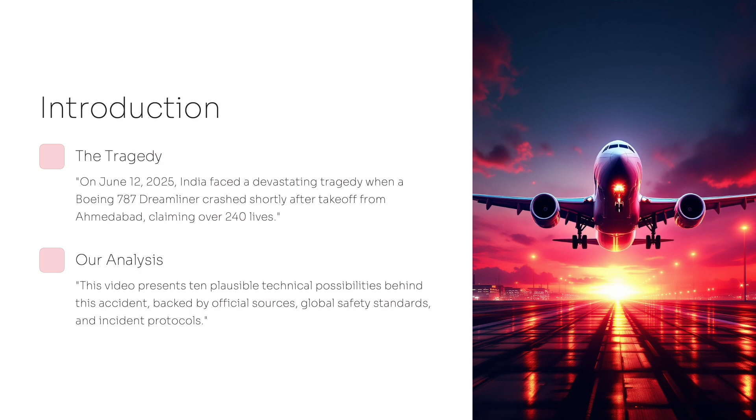Our analysis in this video, as I said before, is going to be the 10 possible technical reasons which may have led to this.

As per protocol, global agencies are now involved in decoding the aircraft's final 30 seconds, because the flight took off and crashed in around 30 plus seconds. That's it. The investigation team is led by India's AAIB, supported by UK AAIB, US NTSB, FAA, DGCA, aircraft and engine manufacturers. We are trying to recover the flight data recorder, which is recovered. However, the cockpit voice recorder is still being searched. Conditions are also being checked, like whether at takeoff it was clear, normal.

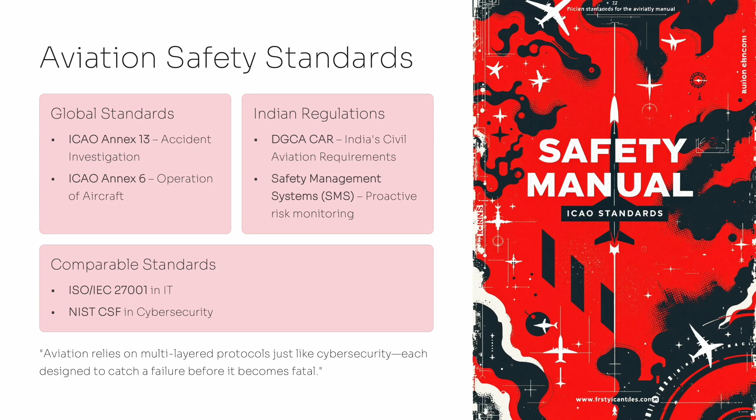As we discussed before, aviation relies on multi-layered protocol just like cybersecurity, each designed to catch a failure before it becomes fatal. Some global standards which every aviation follows are ICAO Annex 13 Accident Investigation, ICAO Annex 6 Operations of Aircraft. Some of the Indian regulations: DGCA CAR, India's Civil Aviation Requirement, Safety Management System, Proactive Risk Monitoring. Those who belong to the IT part of the world can compare it to their ISO 27001, NIST CSF, etc.

Let's look at possibility one, the first possible reason: landing gear not retracted. Unretracted landing gear increases drag dramatically, which can stall an aircraft during ascent. Some eyewitnesses say the gear stayed down throughout. As we know, landing gear causes high aerodynamic drag. Without retraction, lift may not overcome weight. So this could be one possible reason.

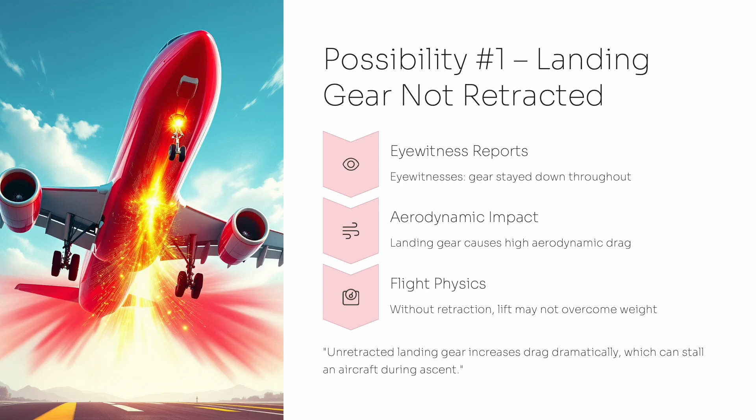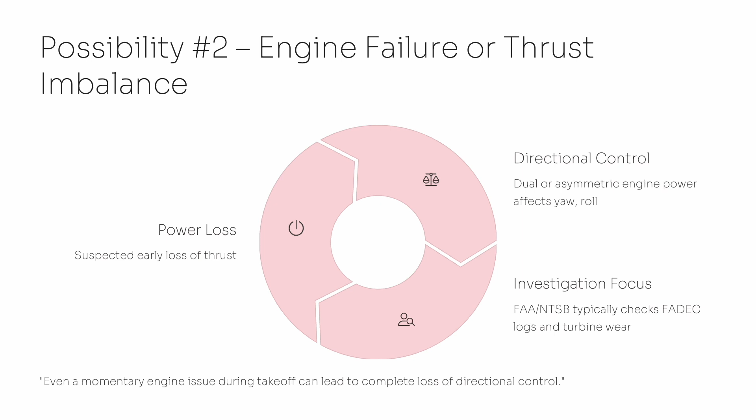The next possibility, which everyone is indicating, is engine failure or thrust imbalance, which may lead to power loss or loss in directional control. The investigation is focusing on FADEC logs and turbine wear logs.

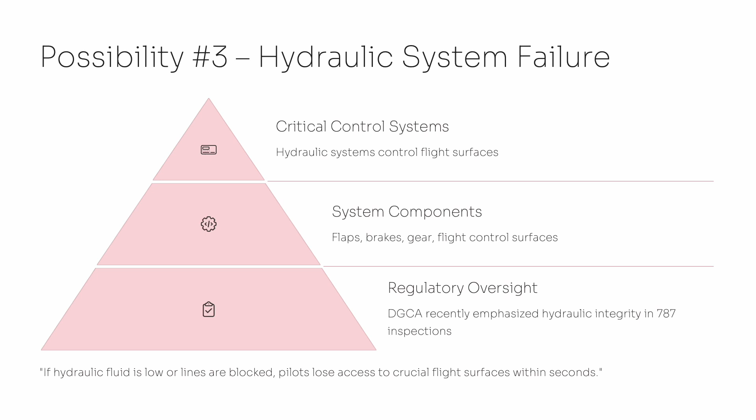The third possibility could be a hydraulic system failure, because if hydraulic fluid is low or lines are blocked, the pilot may lose access to crucial flight surfaces within seconds.

The fourth possibility could be a FADEC or engine electronic control fault. FADEC stands for Full Authority Digital Engine Control. A software level glitch in engine management can simulate a mechanical failure without visible damage.

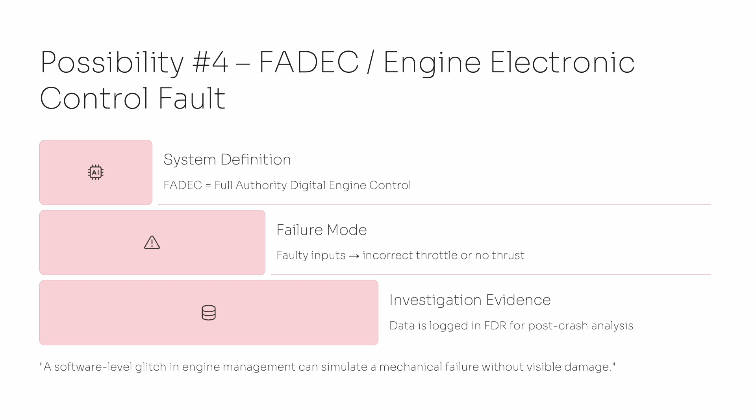The investigation evidence we may need to check is the data logged in the FDR for post-crash analysis. The fifth possibility could be a fuel system irregularity, because jet engines require precise fuel flow.

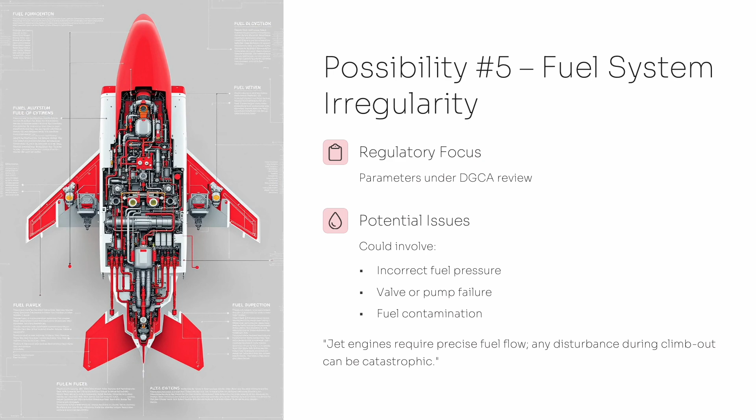Any disturbance during climb out can be catastrophic, and the potential issues could involve incorrect fuel pressure, valve or pump failure, fuel contamination. It could be anything. This is also one of the regulatory focus parameters under DGCA.

The sixth possibility could be improper flap configuration, because improper flap deployment has caused multiple past accidents, especially during manual override or checklist rush. The risk factor is like too little lift causing stall or too much drag, which can lead to flap failure or checklist issues, or maybe both.

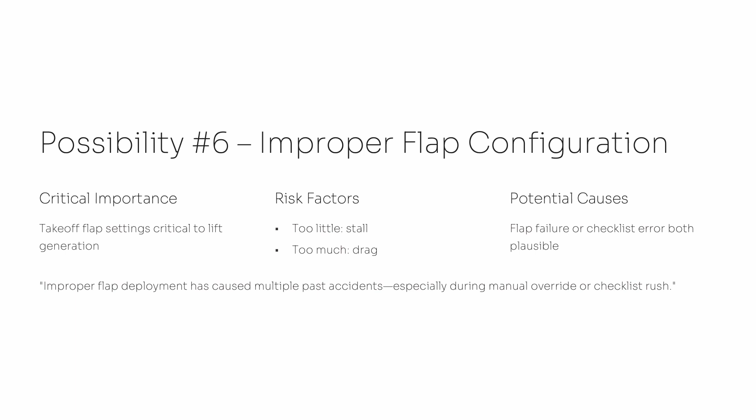The seventh possibility, everyone is indicating, could be a bird strike, which we also call FOD, foreign object damage. Birds or debris can severely damage the turbine blades or flight sensors during takeoff roll.

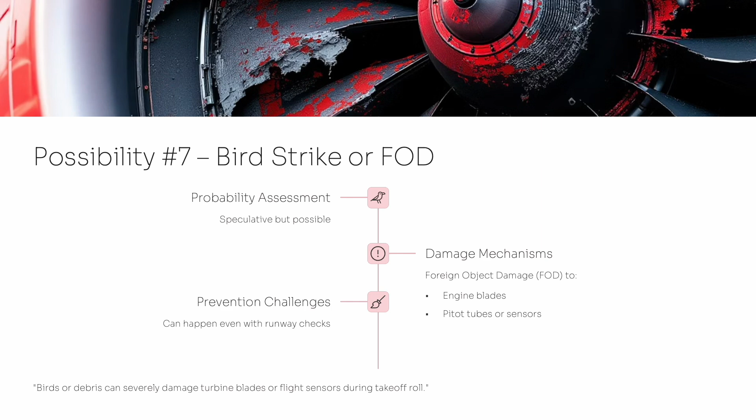The eighth possibility could be avionics or sensor malfunction, because misleading instrument readings can lead the pilot to overcorrect or underreact during high speed climb.

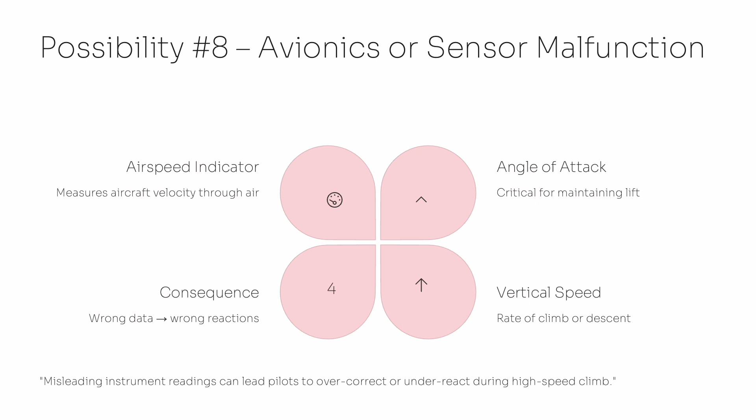The ninth possibility could be human error, like a pilot error or skipping a checklist. Even well-trained crews can miss small but fatal items when under stress or time pressure.

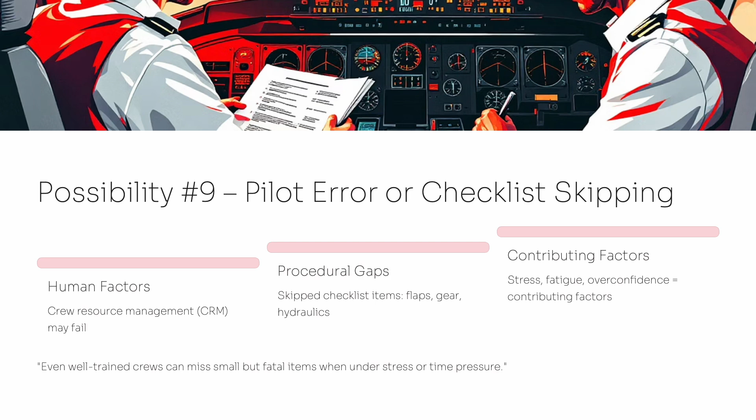The tenth possibility could be a maintenance oversight or unresolved snags, because even a single overlooked defect can cascade into multiple failures if not diagnosed on time.

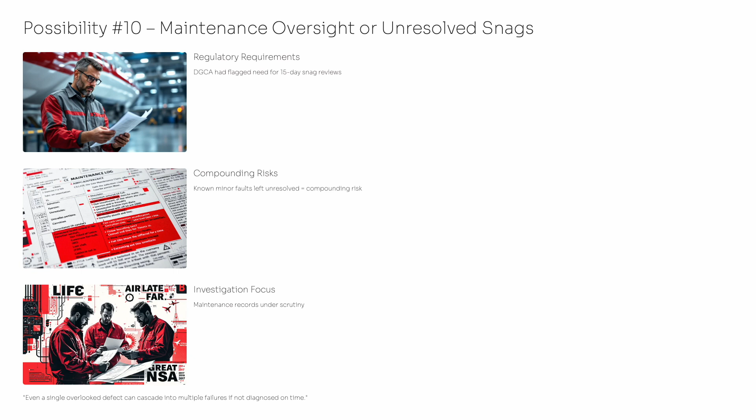So DGCA has flagged the need for 15-day snag reviews. They are also considering compounding risk, that a known minor fault which was left unresolved may have led to this, and maintenance records are also under scrutiny.

Now let's understand what safety mechanisms are in place and what might have failed. Modern planes are built with backups, but a failure of two interlinked systems at once leaves no room to recover. So this could be one reason.

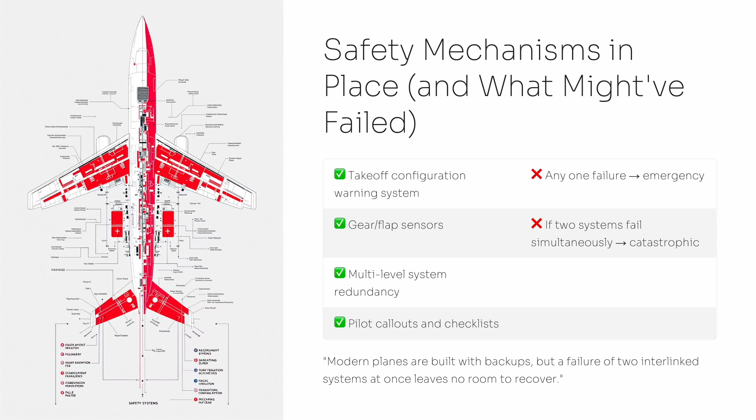Let's see what everyone finds out in the investigation. So what's next going to happen in the investigation? Our data analysis is already in place.

A full FDR analysis is happening for engine pressure, gear position, and thrust level. People are also trying to retrieve voice recordings of what the pilot said in the last 30 seconds.

The CVR is still awaited for pilot conversation and warning alarms. Also, a fleet review is happening, as all Boeing 787s are under review by DGCA.

Regulatory actions are also being taken, like further alerts or airworthiness directives may follow. The final report, whenever released, will detail the full chain of events and issue preventive mandates.

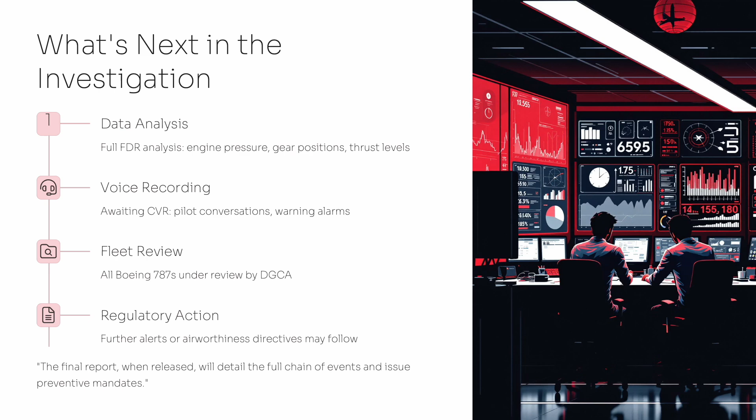Some final thoughts and broader reflections. Small problems that align without backup may lead to 3-4 critical failures. There are already 100 plus safety systems in place.

When a flight takes off, it goes through all those checks. Even a single cause, which is very rare, one in a million chances, may lead to this failure. Just comparing it to cybersecurity, aviation basically runs on system layers and real time data.

Like in any critical system, small failures may stack fast. No plane crashes for one reason, it crashes when 3-4 small problems align without a backup. So this is a one in a million scenario.

Hope this remains the last. That will be the last wish for everyone. Let's see how this comes up as an event or as a learning for the future aviation industry.